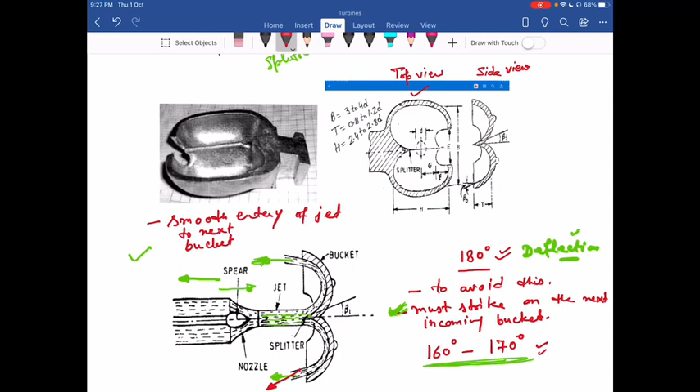Now in these two views, we have three important dimensions. One is B, another is capital T, another is H. Now this B is called the width of the bucket.

Now all these dimensions B, T, H depend on one dimension, that is D. This d is the dia of the jet, the diameter of the jet which is striking at the splitter over here. This is small d. So all dimensions B, T and H depend on this diameter d.

So B is the width of the bucket. That is equal to 3 to 4 times the diameter of the jet.

Then the next is T. Now this T is called thickness, the thickness of the bucket. This is equal to 0.8 to 1.2 times D. This you can see in the side view, 0.8 to 1.2 times the diameter of the jet.

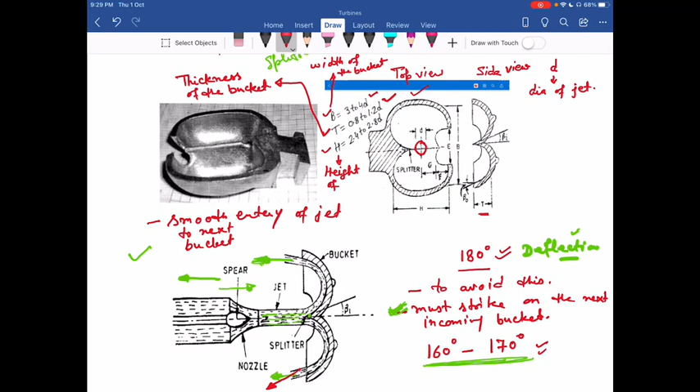The next dimension is H. This H is called the height of the bucket. This height is equal to 2.4 to 2.8 times the diameter of the jet.

So that is in the top view. This is H, this is B, and this is T. So these are the three main important dimensions of a bucket: width of the bucket, thickness of the bucket, and height of the bucket. Then the other important dimensions for the bucket.

One is capital E. Capital E is 1 to 2 times the diameter of the jet, that is E.

Then the F dimension, that is over here. So F is equal to 0.4 times the diameter of the jet, that is F.

Then G is equal to 0.8 to 1 times D, the diameter of the jet, that is this one, G.

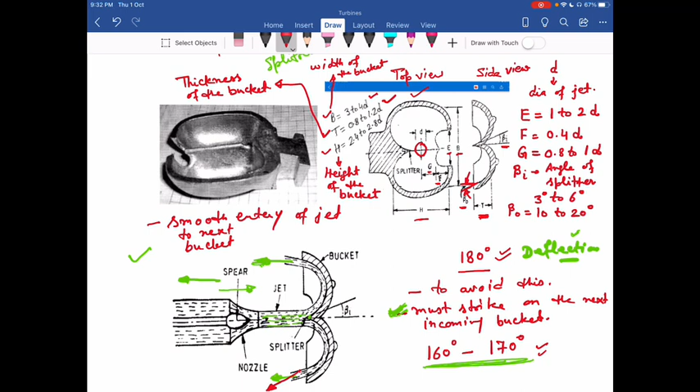So these are the various dimensions of the bucket. The next is the number of buckets. For the number of buckets, we have some deciding factors.

One factor is the friction loss. Now this loss, as we all know, must be on the minimum side. So this loss should be minimum if we have a minimum number of buckets.

So as the number of buckets increases, this friction loss increases. So this tells us we should have a minimum number of buckets on the runner.

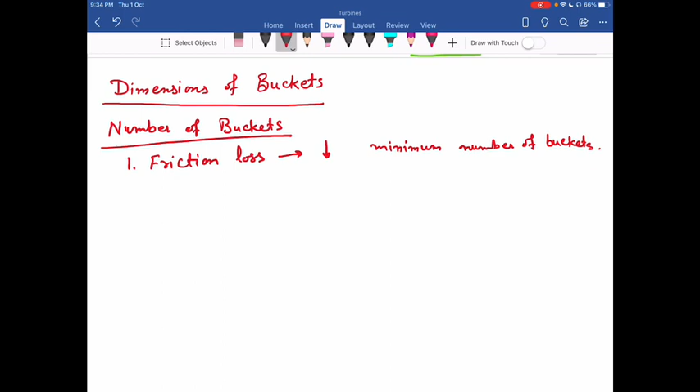Now the other deciding factor for the number of buckets is the deflected water. When the jet strikes the bucket, the water is deflected. That deflected water should not strike back at the incoming bucket. So again our requirement is a minimum number of buckets.

If we have a large number of buckets on the runner, then it happens that when the jet strikes a bucket, the deflected water from that bucket must strike the next incoming bucket. That is possible if we have a large number of buckets. So to avoid that, we should have the minimum number of buckets on the runner.

Now another factor is the available jet must be fully utilized. So the jet available with us should be fully utilized. If we want to use that jet fully, this factor says we should have a maximum number of buckets.

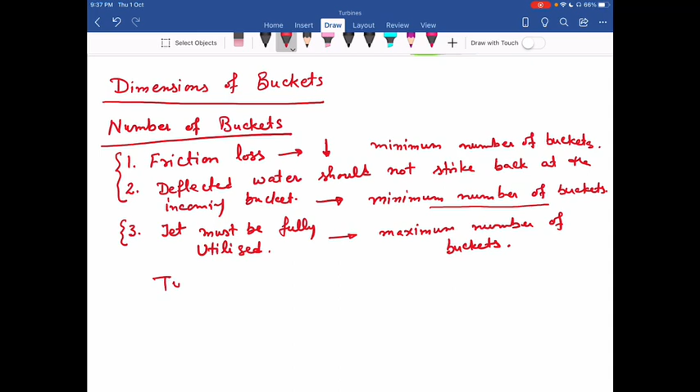This equation says the number of buckets, capital Z, is equal to D divided by 2d plus 15, where D is the diameter of the runner, and small d is the jet diameter. So D divided by 2d plus 15 gives us the optimum number of buckets on the runner.

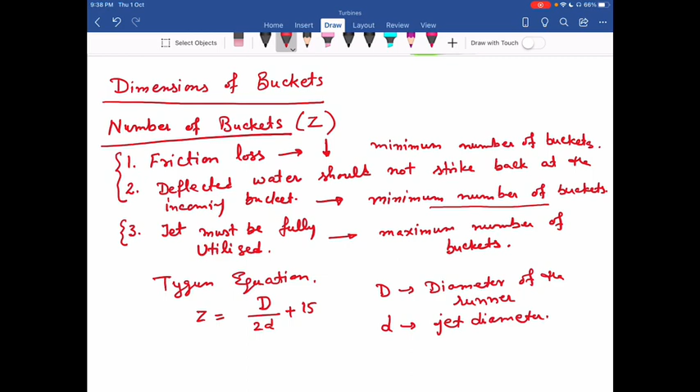Now further, we have one term m, equal to capital D divided by small d. This is called jet ratio. So again, I can write Z as equal to 0.5m plus 15. With the help of this relation, we can calculate the optimum number of buckets on the runner of a Pelton turbine.

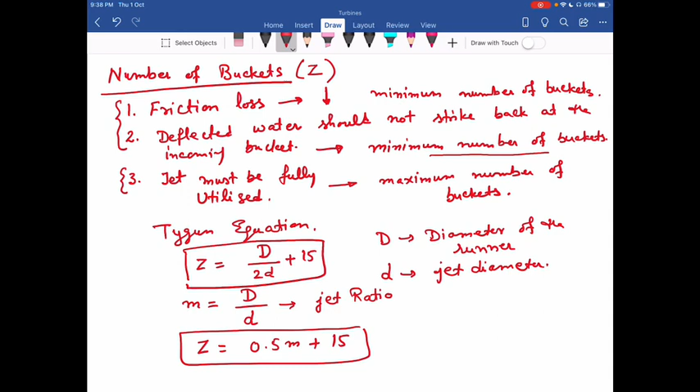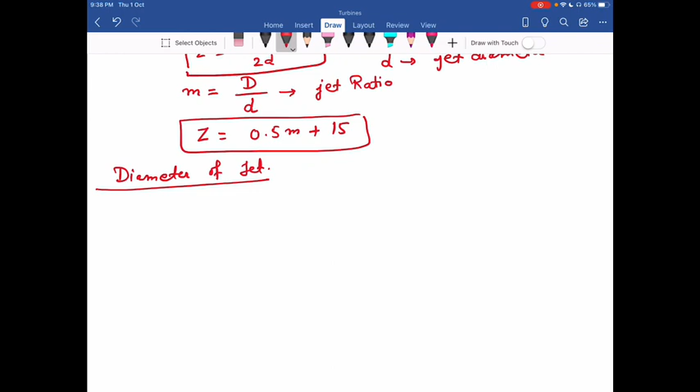The next is the formula for diameter of the jet. We know that velocity of jet coming out from the nozzle is given by Cv under root of 2gh. Vi is the velocity of jet, or you can say this is the inlet velocity to bucket. Cv is coefficient of velocity, its value is 0.96 to 0.99, and H is the net head. So this is the formula for velocity of jet coming out from the nozzle.

Now further, the discharge through the nozzle, Q, is equal to cross sectional area pi by 4 d square into Vi. I can write it as pi by 4 d square into Cv under root of 2gh. So this is equal to the discharge Q. If you have the value of discharge and the value of H, we can calculate d, the diameter of the jet.

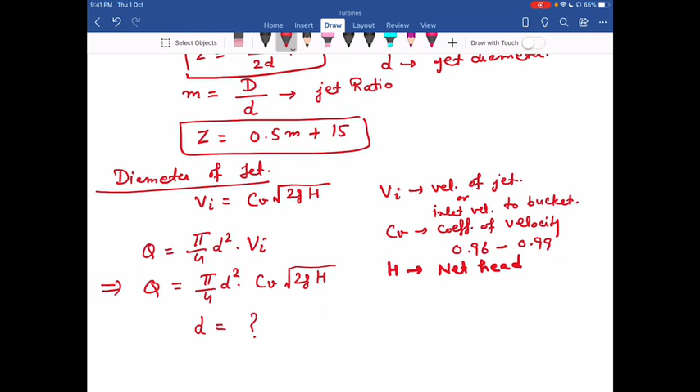The next is the formula for speed ratio, noted by Ku. This is defined as the ratio of tangential velocity of a runner, U, to the theoretical velocity of jet, which is under root of 2gh, that is without Cv. So I can write Ku is equal to U divided by under root of 2gh. This is the formula of speed ratio for Pelton turbine.

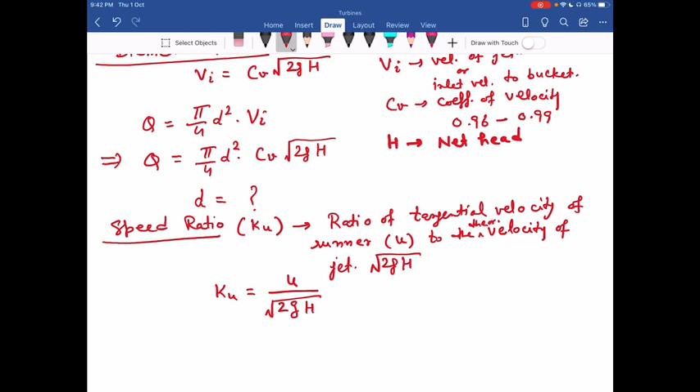You can note here one important point, that the maximum value of Ku is 0.5 for maximum efficiency. We are going to prove this in the next coming articles. However, if we consider the nozzle friction, that means if we consider the value of Cv, this value of Ku is less than 0.5. So if we consider the friction of the nozzle, then the value of Ku is approximately in the range of 0.46 to 0.48. So this is the speed ratio.

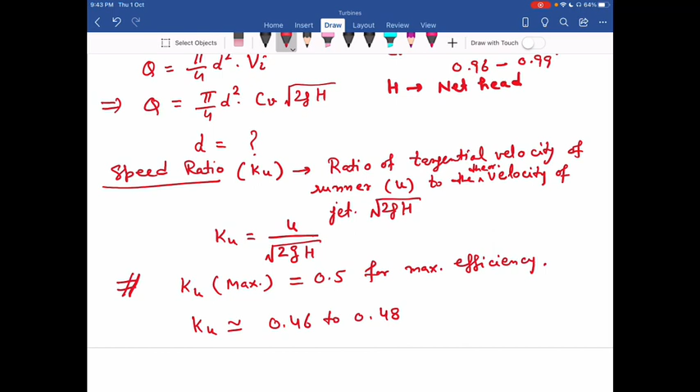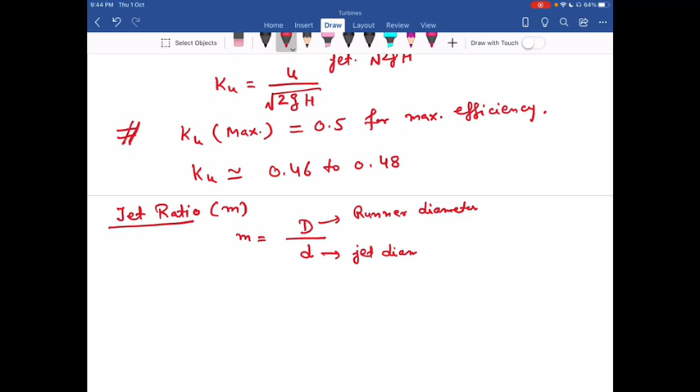The next is the jet ratio, m, small m, and it is the ratio of diameter of the runner to the jet diameter - this is the runner diameter and this is the jet diameter. Now further, this ratio is a function of specific speed.

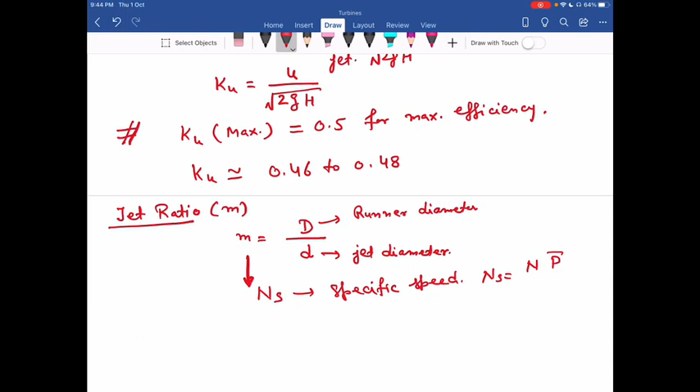The formula for specific speed is n under root of p divided by h raised to power 5 by 4. Now I am going to prove that this specific speed is a function of jet ratio. You can see tangential velocity u is equal to pi d n divided by 60. So from here I can calculate n as 60u divided by pi d. Now further, u in terms of speed ratio, I can write it as 60 into Ku under root of 2gh divided by pi d. So this is the value of n I have.

Then P, power is given by W Q H into overall efficiency, that is the power output. So this is in watt. I can write W as rho g into Q. Now Q I can write as discharge, that is pi by 4 d square into Cv into under root of 2gh.

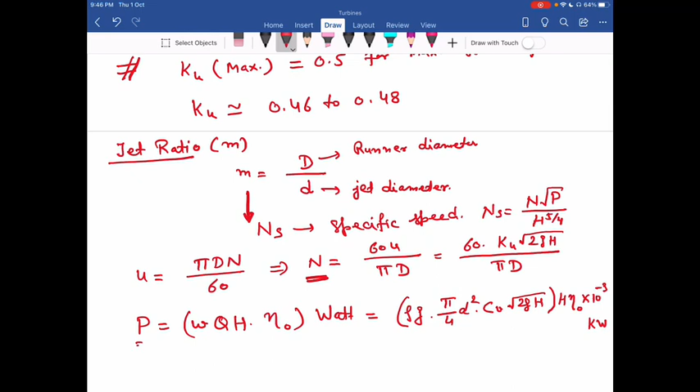Okay, so this is the formula for P I have now. So I have P, I have N. So I put these two values in the formula of Ns.

So I have the relation Ns is equal to 60 Ku under root of 2gh, divided by pi d h raised to power 5 by 4, under root of rho pi by 4 d square Cv under root of 2gh, into g into h, overall efficiency, into 10 raised to power minus 3. This is all under root.

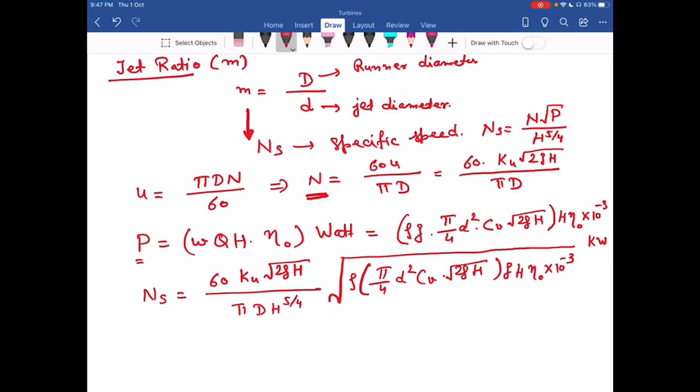Now for a given turbine, if I say I have a turbine with overall efficiency say 87%, so I use the term eta O as 0.87. The maximum value of Ku is say 0.46. Then Cv is 0.98. So if for a turbine I use these values...

You can say specific speed is a function of jet ratio.

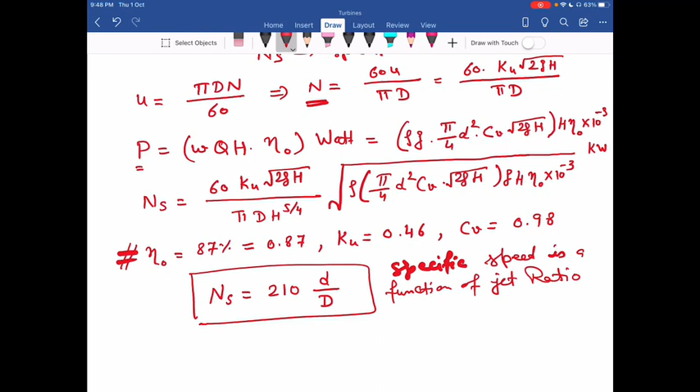Then the number of jets. How do we decide the number of jets?

Okay, so now the discharge. Discharge is given by pi by 4 d square into Vi. So if I need more discharge, that means there is more value of Vi and there is more value of d.

So the purpose to increase the number of jets is to increase the discharge. So if I want to increase the discharge, that means I have to increase d as well as Vi.

But when I proceed further, I see that the values of these two factors for a given value of head and discharge is limited. We have a given value of discharge available in the reservoir, and we have a fixed value of head. So depending upon these two factors, we have the fixed value of number of jets.

So how can you see that? Now this Vi is given by Cv into under root of 2gh. So I have fixed value of h. That means I have limited value of Vi.

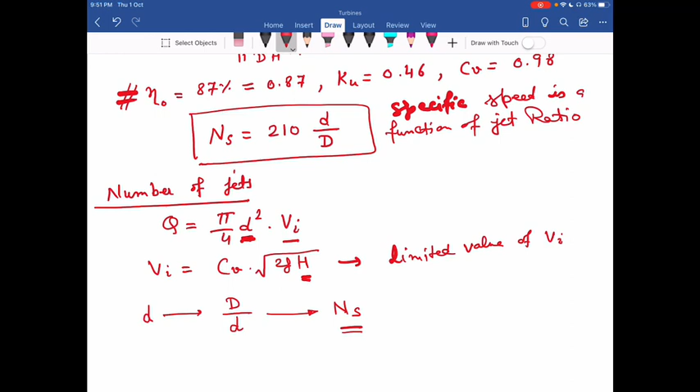So I have U equals pi d n divided by 60, or in terms of speed ratio, if I write U, that is Ku under root of 2gh. So you can see for a fixed value of h, my U is fixed or limited.

That means U is equal to pi d n by 60, so that means I have a fixed value of D. So as my specific speed is limited, Ns is limited, D is limited. That means I have a limited value of d.

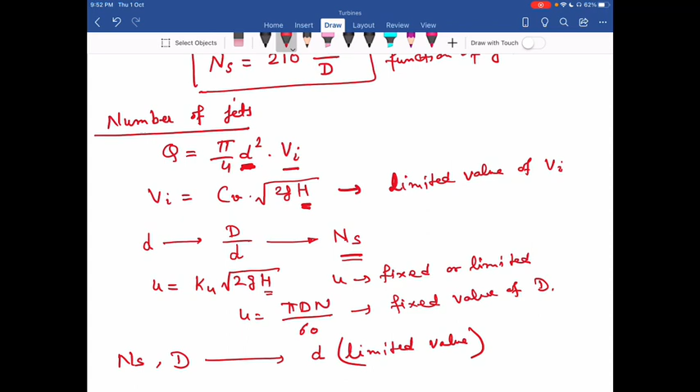Okay, so I have now reached one conclusion: that I have a limited value of d and Vi. So I cannot increase Q beyond a particular limit.

So the number of nozzles I cannot increase beyond a particular value. That does not solve my purpose to increase the value of Q to the turbine. This is because of the limiting value of these two factors.

So to use the available discharge at the maximum optimum level, I can use the number of nozzles up to 6. So the maximum number of nozzles, or you can say jets, is up to 6.

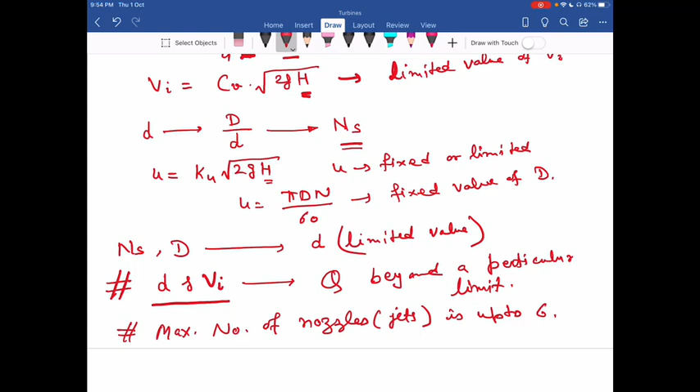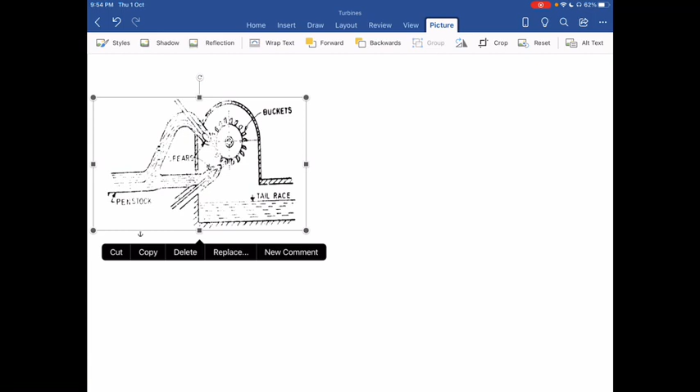Now you can see in this diagram how I can use the nozzles. In this diagram you can see I have two nozzles - here one nozzle and here is the second nozzle. Now you can see another diagram.

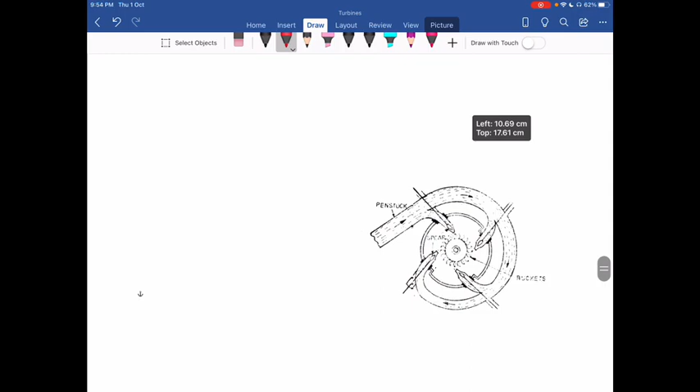In this diagram you can see I have four nozzles: one, two, three, and four. So like this, the maximum number of nozzles that I have in the Pelton turbine is up to 6. If I try to increase this number beyond 6, then this whole system becomes complicated.